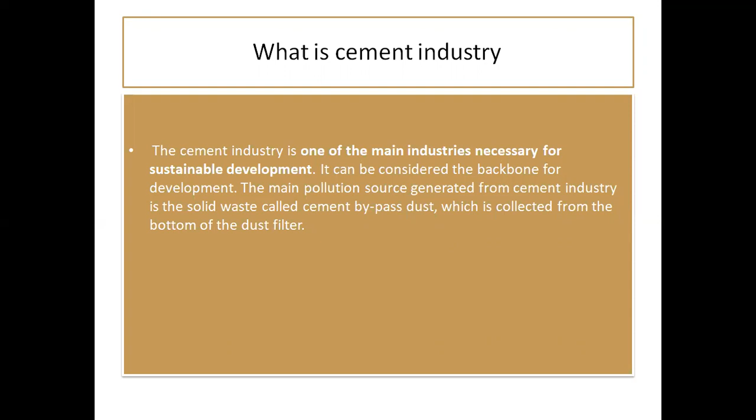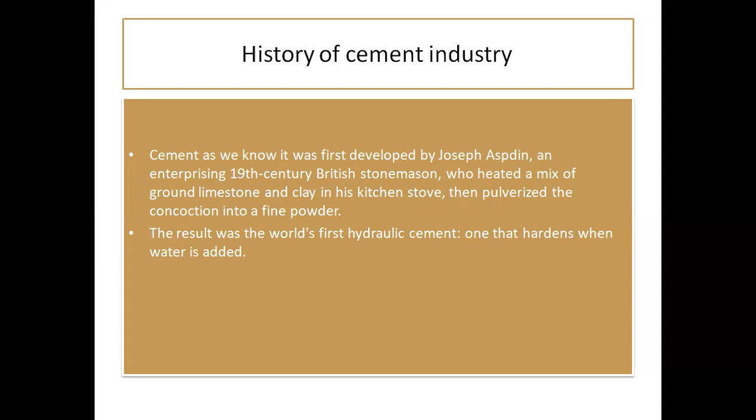Next, I will discuss the history of the cement industry. Cement, as we know, was first developed by Joseph Aspdin, an enterprising 19th century British stonemason, who heated a mix of ground limestone and clay in his kitchen stove, then pulverized the concoction into fine powder. The result was the world's first hydraulic cement, one that hardens when water is added.

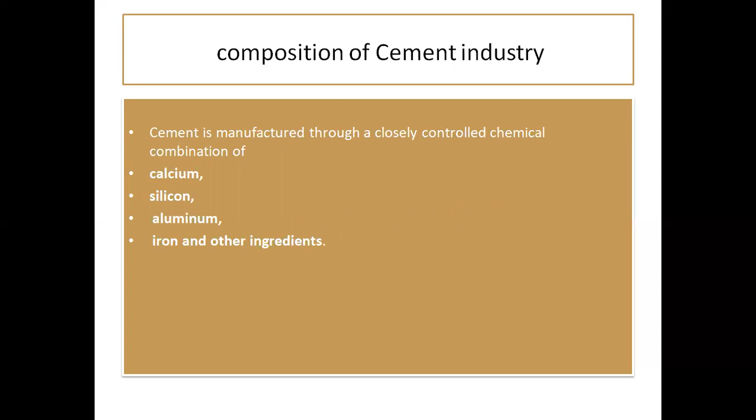Next, the composition of the cement industry. Cement is manufactured through a closely controlled chemical combination of calcium, silicon, aluminium, and the last one is iron, and other ingredients.

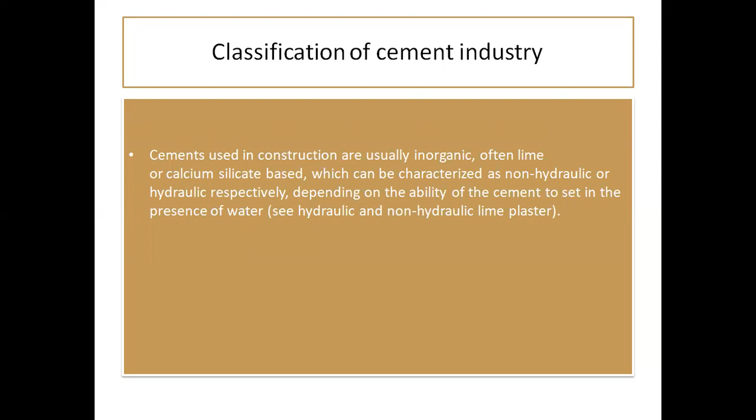Next, I will discuss the classification of the cement industry. Cements used in construction are usually inorganic, often lime or calcium silicate based, which can be characterized as non-hydraulic or hydraulic respectively, depending on the ability of the cement to set in the presence of water.

Basically it is classified into two parts: hydraulic cement and non-hydraulic cement. Hydraulic cement is made out of limestone, clay, and gypsum. Non-hydraulic cement is composed of lime, gypsum plaster, and oxychloride.

Hydraulic cement hardens when there is a chemical reaction between anhydrous cement powder and water. The hydrates that are formed are not soluble in water. It retains its strength and hardness below water.

Non-hydraulic cement hardens when there is a reaction due to carbonation with the carbon dioxide naturally present in the air. Hydraulic cement hardens underwater or when in contact with wet weather, hence it is suitable to work in any climatic condition. Non-hydraulic cement should be kept dry to attain strength.

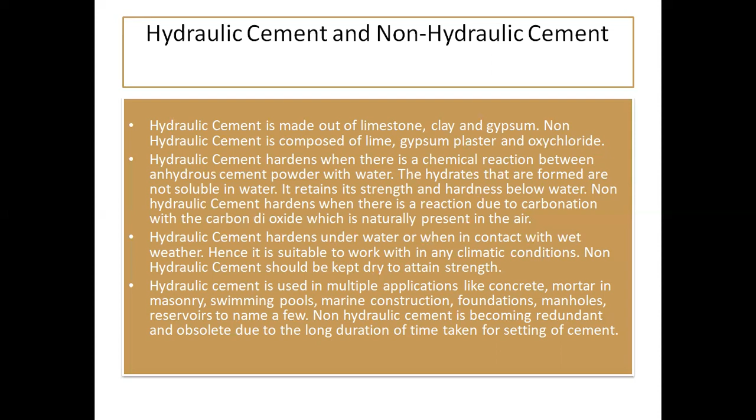Hydraulic cement is used in multiple applications like concrete, mortar in masonry, swimming pools, marine construction, foundations, and reservoirs, to name a few. Non-hydraulic cement is becoming redundant and obsolete due to the long duration of time taken for setting of cement.

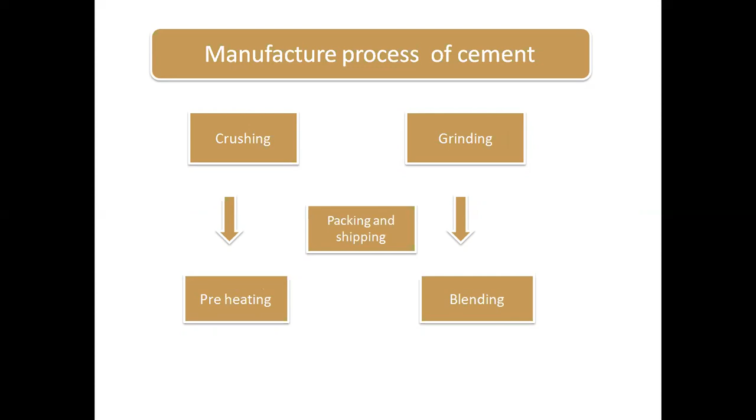Manufacture process of cement: first crushing, second grinding, third preheating, fourth blending, and the last is packing and shipping. So let's start.

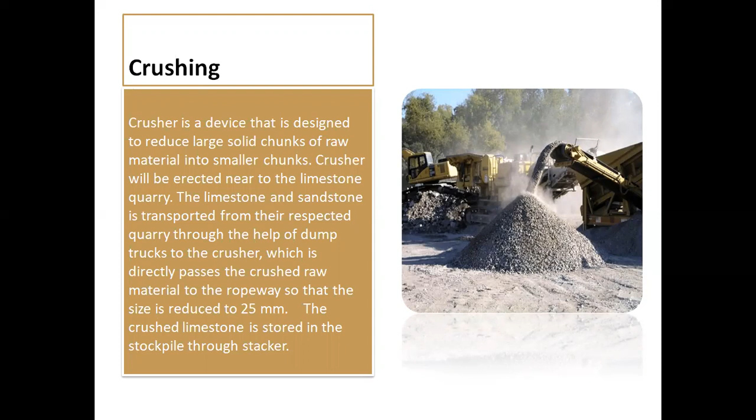First, crushing. A crusher is a device designed to reduce large solid chunks of raw material into smaller chunks. The crusher will be erected near the limestone quarry. The limestone and sandstone are transported from their respective quarries through dump trucks to the crusher, which directly passes the crushed raw material to the ropeway so that the size is reduced to 25 millimeters. The crushed limestone is stored in the stockpile through a stacker.

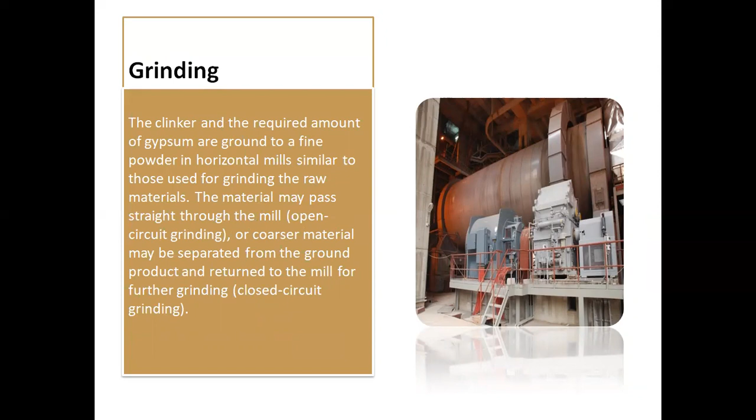Second, grinding. The clinker and the required amount of gypsum are ground to a fine powder in horizontal mills, similar to those used for grinding the raw materials. The materials may pass straight through the mill, or coarser material may be separated from the ground product and returned to the mill for further grinding.

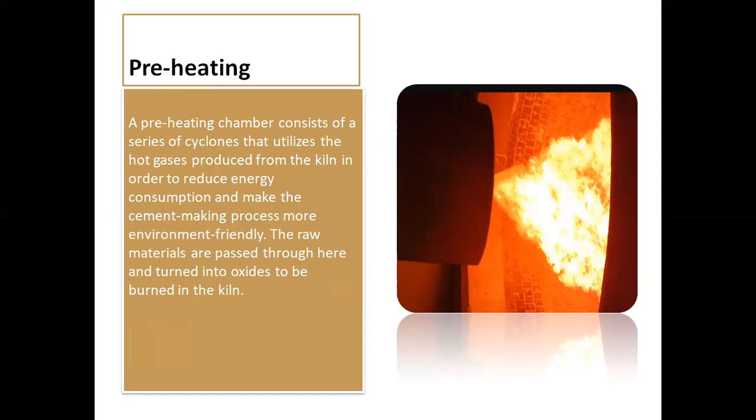Third, preheating. A preheating chamber consists of a series of cyclones that utilize the hot gases produced from the kiln in order to reduce energy consumption and make the cement making process more environment friendly. The raw materials pass through here and are turned into oxides to be burned in the kiln.

Fourth, blending. A first approximation of the chemical composition required for a particular cement is obtained by selective quarrying and control of the raw material fed to the crushing and grinding plant. Finer control is obtained by drawing material from two or more batches containing raw mixes of slightly different composition.

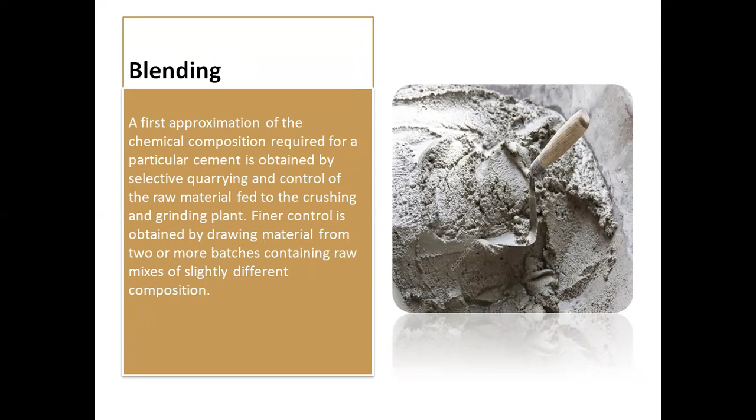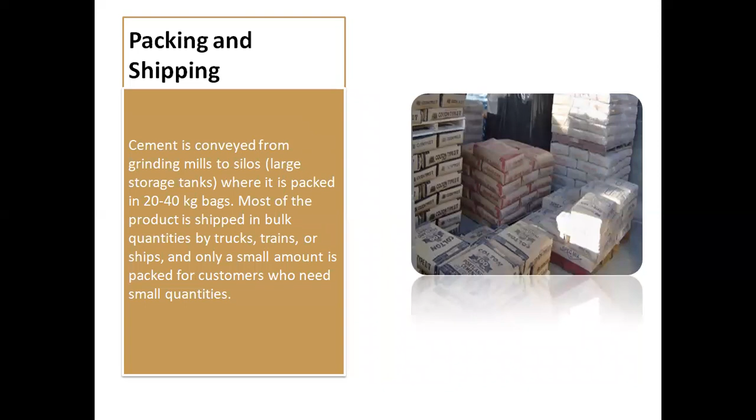Lastly, I will discuss packing and shipping. Cement is conveyed from grinding mills to silos where it is packed in 20 to 40 kilogram bags. Most of the product is shipped in bulk quantities by trucks, trains, or ships, and only a small amount is packed for customers who need small quantities.

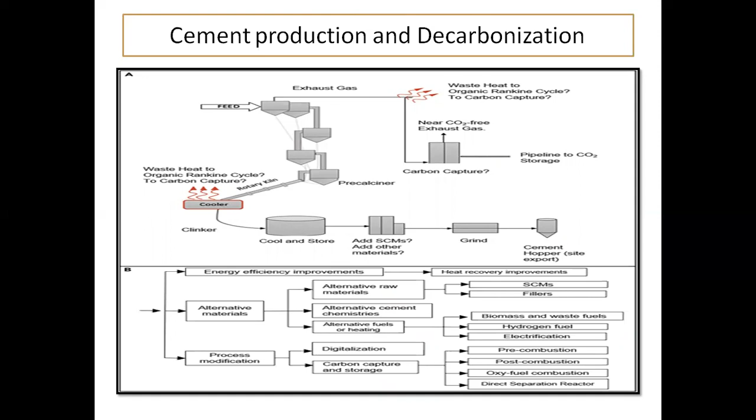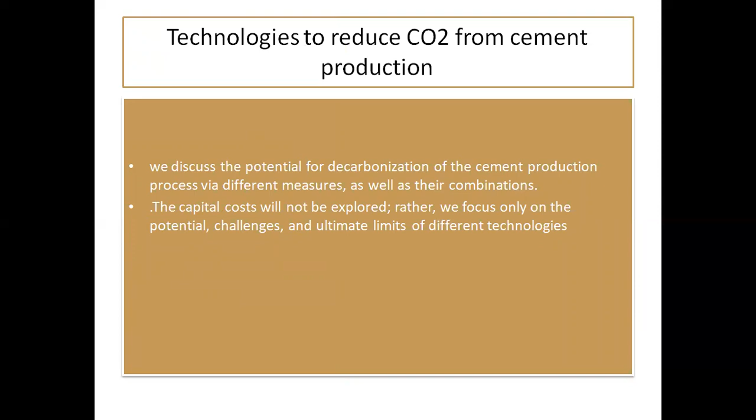Next, I will discuss cement production and decarbonization. I will explain the technology used to reduce CO2 from cement production. The capital cost will not be explored; rather we focus only on the potential challenges and ultimate limits of different technologies. First, efficiency improvement.

Efficiency improvement has been incremental in recent years, as expected in a mature industry. The average thermal intensity across the globe fell from 3.75 for clinker in 2000 to 3.5 in 2014, around negative 0.5% a year. Given that both process and fuel-related emissions account for a significant proportion of total direct emissions, both process modification and energy efficiency are important for CO2 mitigation.

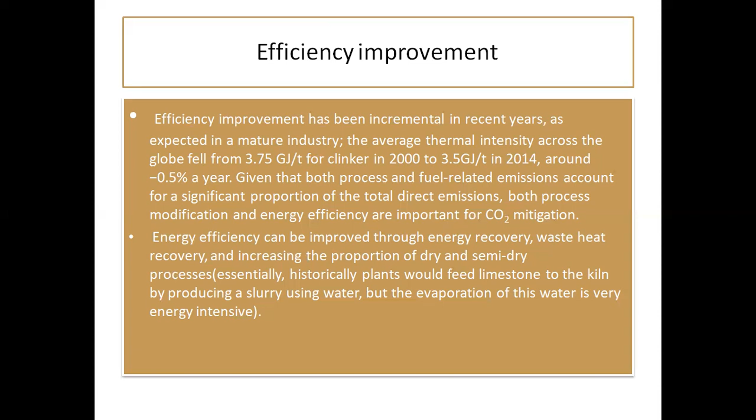Energy efficiency can be improved through energy recovery, waste heat recovery, and increasing the proportion of dry and semi-dry processes. Historically, plants would feed limestone to the kiln by producing a slurry using water, but the evaporation of this water is very energy intensive.

Second, waste heat recovery. Waste heat recovery assumes that minor improvements continue, allowing a low 5% improvement in fuel use. There are significant heat losses, about 35% to 40%, from a cement manufacturing plant, mainly as a result of the airstream used to cool the clinker to 100 degrees and the flue gases.

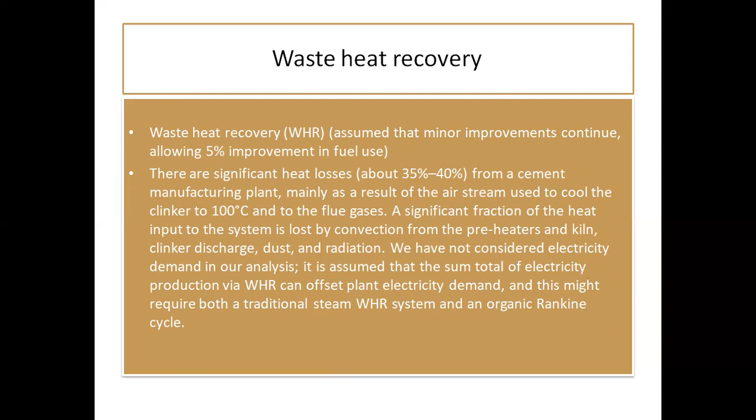A significant fraction of the heat input to the system is lost by convection from the preheaters and kiln, clinker discharge, dust, and radiation. We have not considered electricity demand in our analysis. It is assumed that the sum total of electricity production via waste heat recovery can offset plant electricity demand, and this might require both a traditional steam waste heat recovery system and an organic Rankine cycle.

Third, lower clinker and lower carbon cements. SCMs have emissions associated with their production, and the partitioning of these emissions between their production and final use is complex. Here we focus on direct emissions, given that construction managers have become more comfortable with these substitutions because of greater experience globally with them.

The amount of clinker in a given volume of cement has decreased. Currently, the average global clinker ratio is around 0.7, but this is heavily influenced by Chinese clinkers, which are now starting to use fewer SCMs. We assume a base clinker content of 0.7, a reasonable reduction to 0.6 using current SCMs, but have investigated the effects of reducing clinker down to a ratio of 0.5.

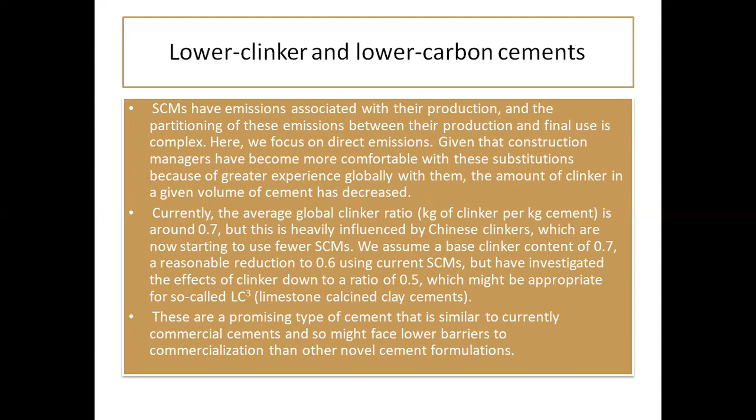Which might be appropriate for so-called limestone calcined clay cements. These are a promising type of cement that is similar to currently commercial cements, and so might face lower barriers to commercialization than other novel cement formulations.

Next, I will discuss alternative fuels. The use of alternative fuels can substantially reduce overall emissions compared with those of a fossil fuel plant, but ensuring the climate benefits requires careful analysis to traceably certify such reductions.

According to the International Energy Agency, between 60% and 80% of the carbon in municipal solid waste is biogenic in nature. A biogenic fraction of 0.7 has been assumed here. The replacement of fossil fuels with waste-derived alternative fuels is a cost-saving way to reduce fossil fuel use, in addition to being a relatively environmentally friendly method of waste management, particularly if care is taken to divert all recyclable material prior to use in the kiln.

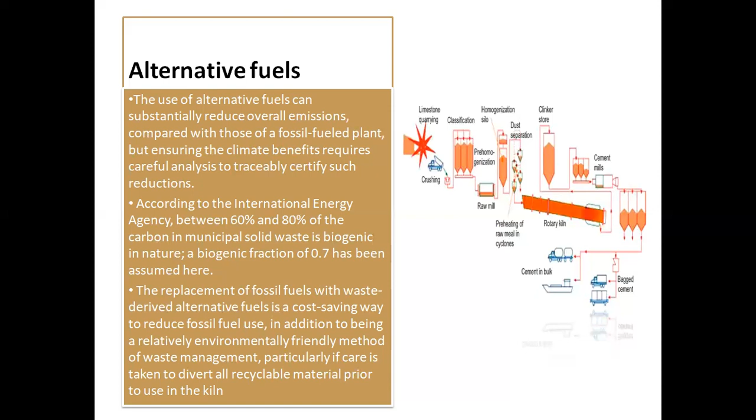Next, I discuss biomass fuel. Biomass fuels are another option for reducing emissions, assuming the biomass is CO2 neutral.

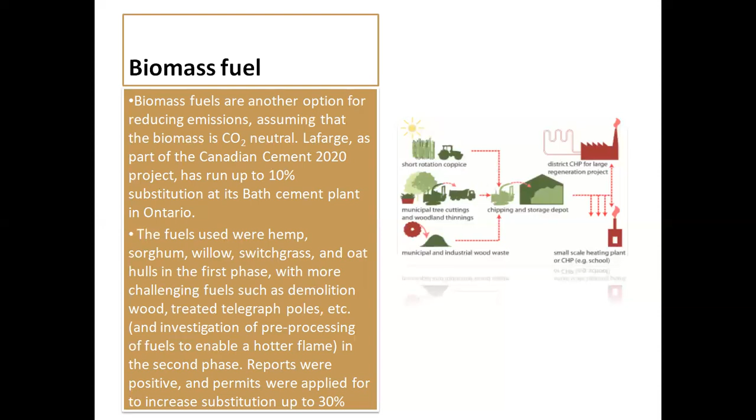And last, hydrogen fuel and/or electrification. Hydrogen fuel and/or electrification could potentially provide up to 100% of the heat in the system, but compared with the magnitude of reduction in CO2 emissions, the complexity and cost of designing and deploying hydrogen-driven kilns are high. Importantly, no fuel avoids process emissions from calcination of CaCO3, which account for 60% of the total.

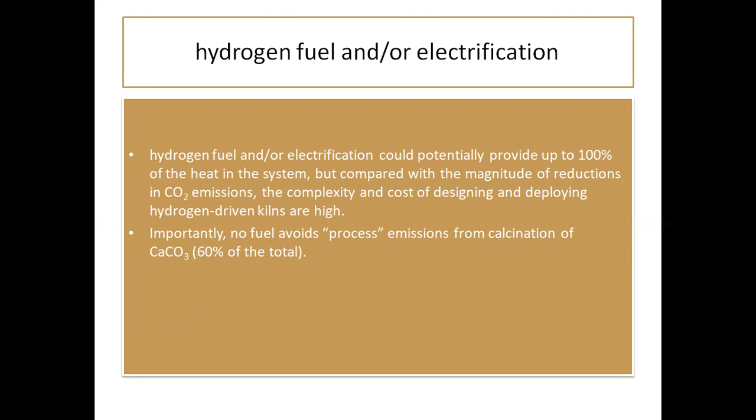I will discuss digitalization. The benefits to cement plants from improved process control and next generation measurement devices are significant. Lafarge Holcim is a leader in this area and has started a Plants of Tomorrow initiative which will roll out technologies including robotics, AI, and predictive maintenance.

A plant certified under the scheme is stated to have a 15% to 20% improvement in operational efficiency. More than 80% of Lafarge Holcim cement plants are already connected to its technical information system, allowing performance tracking and allocation of resources centrally.

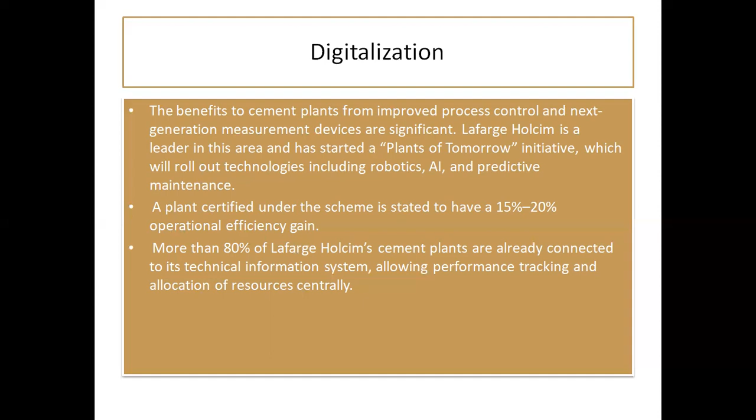Next, I will discuss carbon capture and storage. Traditionally, emissions from both the kiln and calcining limestone are combined into a single flue gas stream that passes through the preheating train and out of the plant, because of the high CO2 concentration, 14% to 33% by volume.

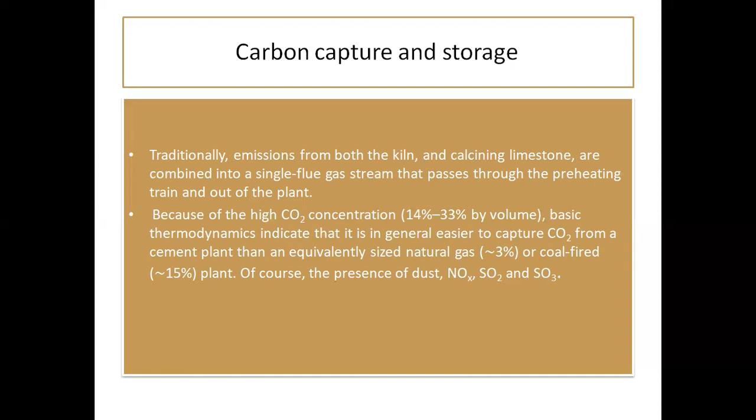Basic thermodynamics indicate that it is in general easier to capture CO2 from a cement plant than an equivalently sized natural gas combined cycle plant, although there is the presence of dust, nitrogen oxide, sulfur oxide, and SO3 to consider.

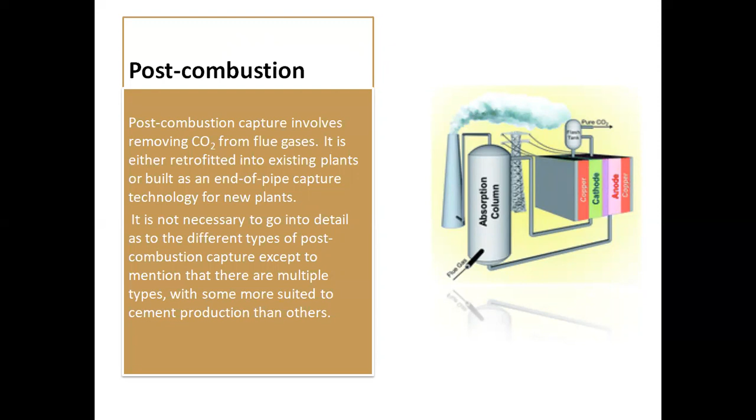Post combustion capture involves removing CO2 from flue gases. It is either retrofitted into existing plants or built as an end-of-pipe capture technology for new plants. It is not necessary to go into detail as to the different types of post-combustion capture, except to mention that there are multiple types, with some more suited to cement production than others.

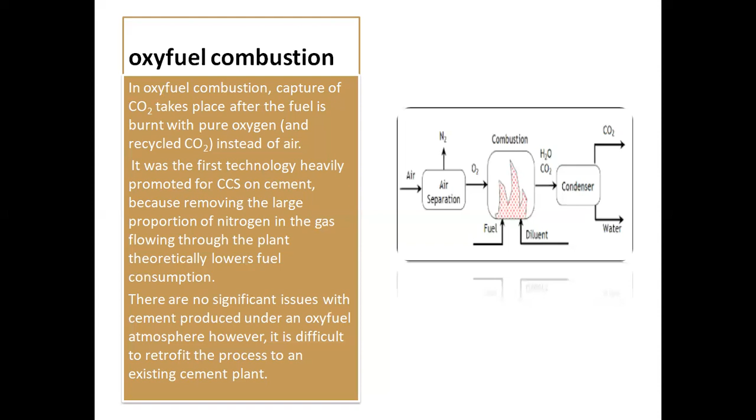Oxyfuel combustion: in oxyfuel combustion, capture of CO2 takes place after the fuel is burned with pure oxygen and recycled CO2 instead of air. It was the first technology heavily promoted for CCS on cement, because removing the large proportion of nitrogen in the gas flowing through the plant theoretically lowers fuel consumption. There are no significant issues with cement produced under an oxyfuel atmosphere, however, it is difficult to retrofit the process to an existing cement plant.

Direct separation reactor: this comprises a novel method to calcine limestone, a large externally heated tube that calcines ground limestone as it falls through it vertically. The re-engineering of the process allows the capture of almost pure CO2 released from the limestone without substantially increasing energy use, except for a potential decrease due to less efficient indirect firing in the calciner, or significant additional cost.

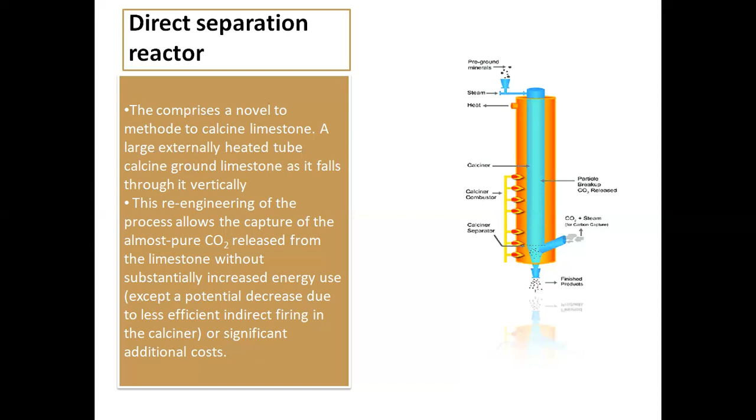Next, I will discuss emission from cement manufacturing process. The most significant environment, health, and safety issue of cement manufacturing is emission. Cement industry is a potential anthropogenic source of air pollution. It is estimated that cement production originates about 5% of global man-made CO2 emission.

The typical gases emitted to air from cement production include NOx, SOx, CO, CO2, H2S, VOC, dioxins, furans, and particulate matters. These major pollutants can be classified into two categories: gases and particulates.

Fuel combustion process is a source of gaseous emissions, which include oxides of nitrogen, oxides of sulfur, oxides of carbon, volatile organic compounds, and hydrogen sulfide.

Quarrying, drilling, blasting, hauling, cement mill, fuel preparation, packaging, road cleaning, and stacks are sources of particulate matter in the form of dust and carbon particles.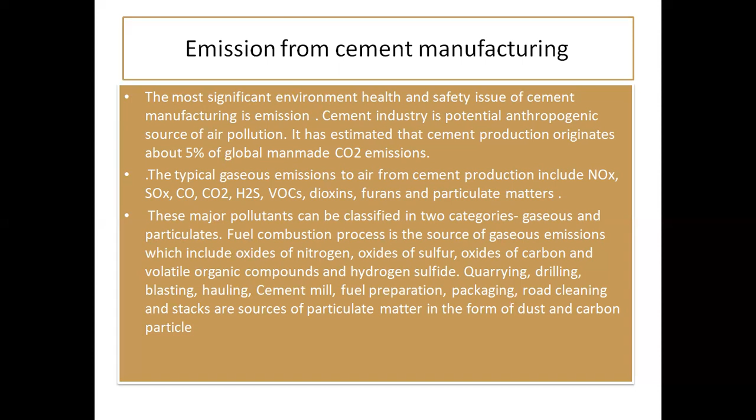Other sources of emissions from cement manufacturing: there are many other sources, such as emissions from transportation, equipment used in mining and transporting raw and finished material, fuel used for electricity production, for operating other processes in cement manufacturing, and types of fuel used in cement industry for few selected countries.

SO2 and O2 - but the highly alkaline condition in the kiln can absorb 90% of the sulfur oxides. Sulfur oxide emission can be controlled by using low sulfur fuel and raw materials.

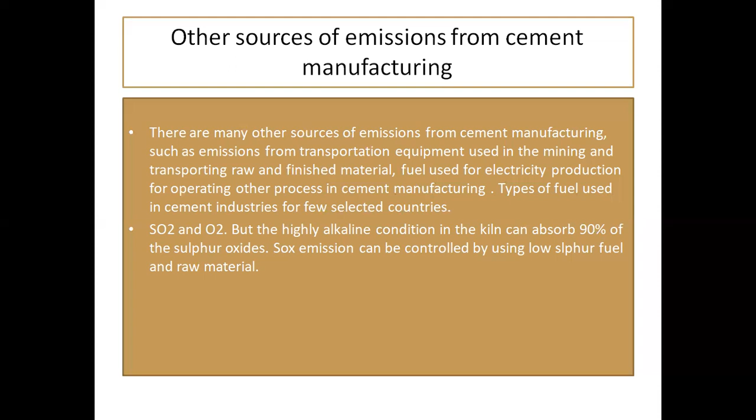Health and environmental effects of cement plant emissions. First, nitrogen oxide. Second, carbon monoxide. Third, sulfur dioxide. Fourth, particulate matters. And the last one is VOC and dioxins.

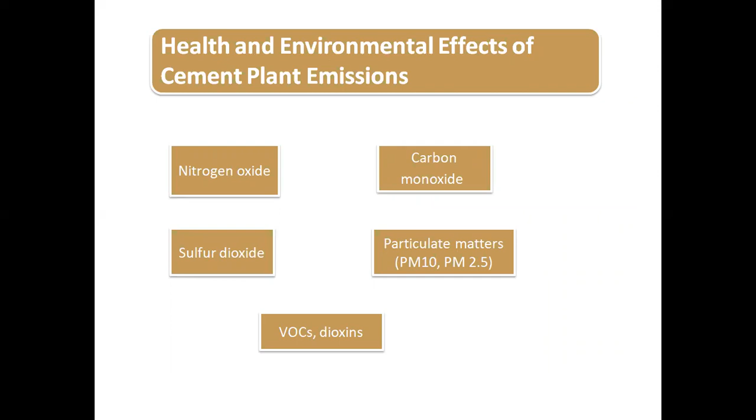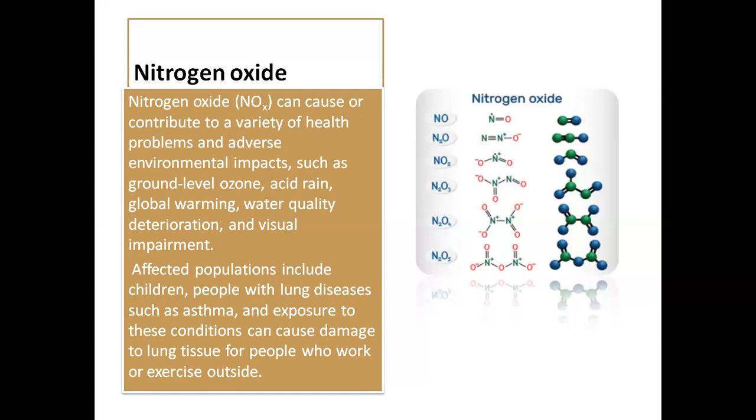I will discuss the first one: nitrogen oxides. Nitrogen oxides can cause or contribute to a variety of health problems and adverse environmental impacts, such as ground level ozone, acid rain, global warming, and water quality deterioration, and visual impairment. Affected populations include children and people with lung diseases such as asthma, and exposure to these conditions can cause damage to lung tissue for people who work or exercise outside.

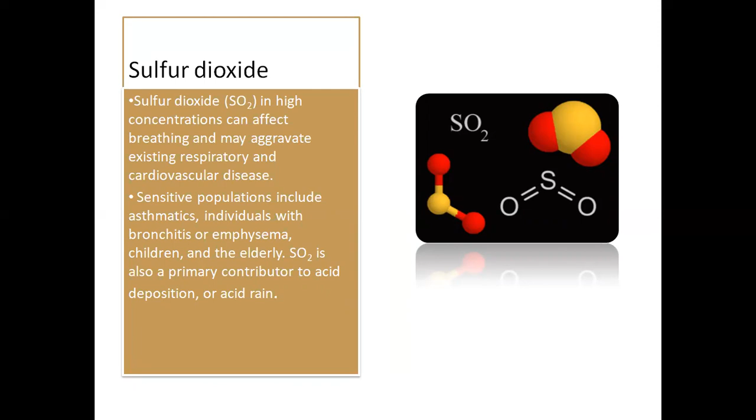Second one, sulfur dioxide. Sulfur dioxide in high concentration can affect breathing and may aggravate existing respiratory and cardiovascular disease. Sensitive populations include asthmatics, individuals with bronchitis or emphysema, and children. SO2 is also a primary contributor to acid deposition or acid rain.

Third one, carbon monoxide. Carbon monoxide can cause harmful health effects by reducing oxygen delivery to the body's organs and tissue, as well as adverse effects on the cardiovascular and central nervous systems. CO also contributes to the formation of smog, which can cause respiratory problems.

Fourth one, particulate matters. Particulate matters are emitted from quarrying, hauling, crushing, grinding of raw materials and clinker, fuel preparation, clinker grinding, and cement packing. Particulate matter consists of fine particles that can remain suspended in the air, which include dust, soot, and liquid droplets. The main environmental problem resulting from dust emissions is reduced visibility and deteriorated ambient air quality. When the dust is washed with rain, it can also pollute water bodies.

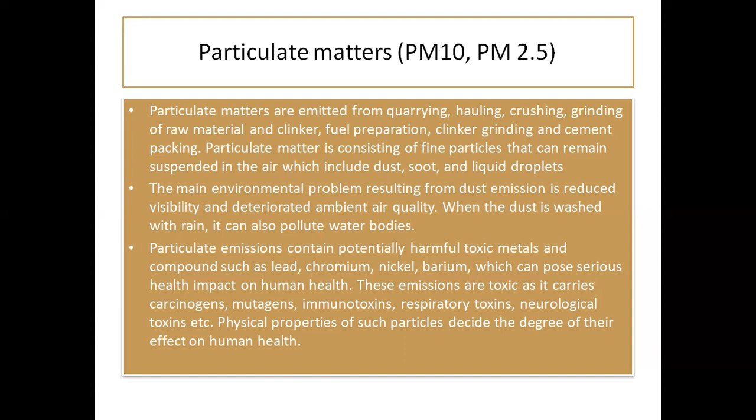Particulate emissions contain potentially harmful toxic metals and compounds such as lead, chromium, nickel, barium, which can pose serious health impacts on human health. These emissions are toxic as they carry carcinogens, mutagens, immunotoxins, respiratory toxins, etc. Physical properties of such particles decide the degree of their effects on human health.

And the last one is VOC, dioxins, heavy metals, and other pollutants. Cement-related emissions in trace quantity include VOC, dioxins, furans, methane, heavy metals, etc. The main source of VOC emissions from cement kiln is organic matter present in raw materials. Occurrence of VOC is also associated with incomplete combustion.

Heavy metals emissions depend on the content of these trace elements in fuel and raw materials, which is naturally present in low concentration in cement manufacturing. Dioxins are also formed in the combustion system when chlorine and organic compounds are present. Choice of raw materials and fuel with low organic matter and low content of volatile and semi-volatile heavy metals can reduce these emissions.

VOC are precursors to ozone formation, which can also contaminate soil and groundwater. It has been identified that VOC can cause retardation of plant growth, chlorosis, and necrosis in broad-leaf plants. Heavy metals and dioxins can also contaminate soil and water.

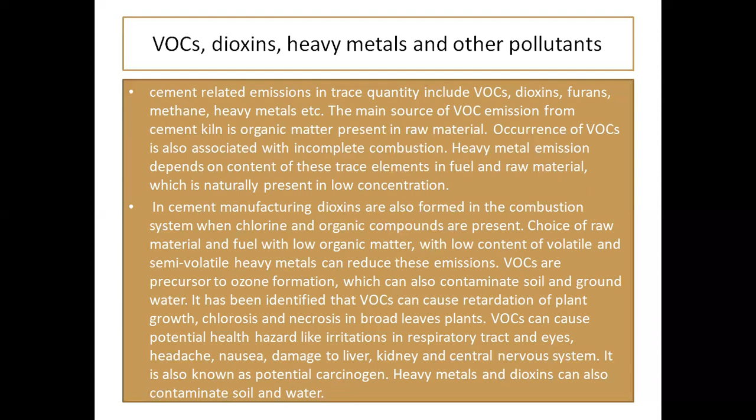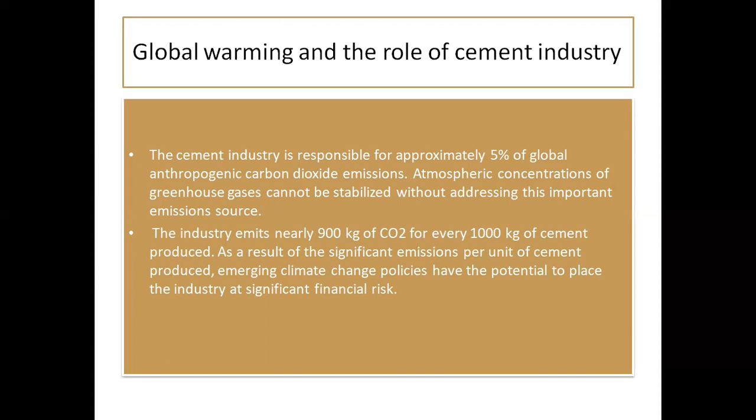Global warming and the role of cement industry. The cement industry is responsible for approximately 5% of global anthropogenic carbon dioxide emissions. Atmospheric concentrations of greenhouse gases cannot be stabilized without addressing this important emission source. The industry emits nearly 900 kg of CO2 for every 1000 kg of cement produced. As a result of the significant emissions per unit of cement produced, emerging climate change policies have the potential to place the industry at significant financial risk.

Climate change, the role of cement industry. An industry-wide climate change response strategy to manage the associated environmental and financial risks - ten of the world's largest cement companies, under the auspices of the World Business Council for Sustainable Development, sponsored a quantitative assessment of current and potential future CO2 emissions from the cement industry in regions of the world.

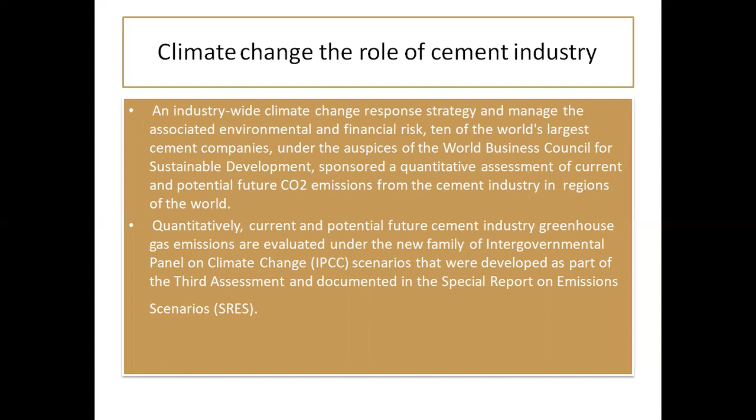Quantitatively, current and potential future cement industry greenhouse gas emissions are evaluated under the new family of Intergovernmental Panel on Climate Change scenarios, which were developed as part of the third assessment and documented in the Special Report on Emissions Scenarios.

If the industry does not improve its current specific emissions, its relative contribution to anthropogenic CO2 emissions would increase by more than one order of magnitude over the next century. The industry faces several challenges as it seeks to reduce its specific CO2 emissions, including its heavy dependence on fossil fuels, its dependence on limestone-based clinker, and the age and efficiency of its capital stock, especially in regions where future demand is expected to be high.